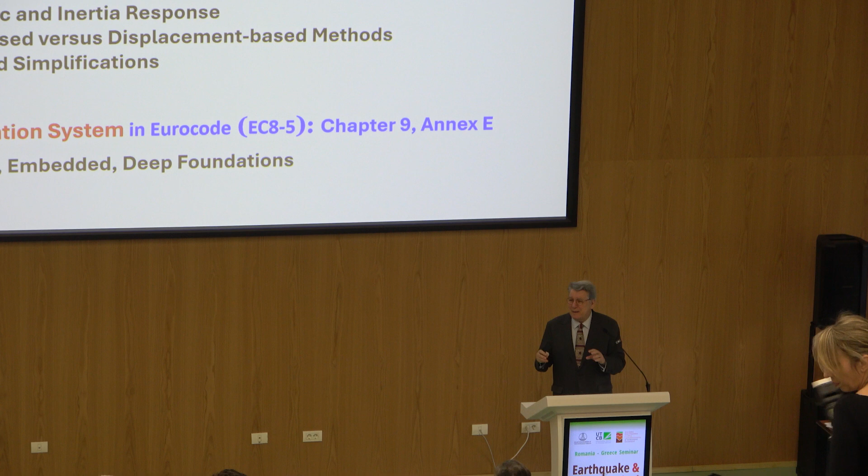And then, if time allows me, and this watch doesn't interrupt, I will talk about some aspects of the foundation system, which is very similar to the previous one. We have two separate chapters - I think it's a little bit too detailed for this, but anyway: shallow, embedded, and deep foundations.

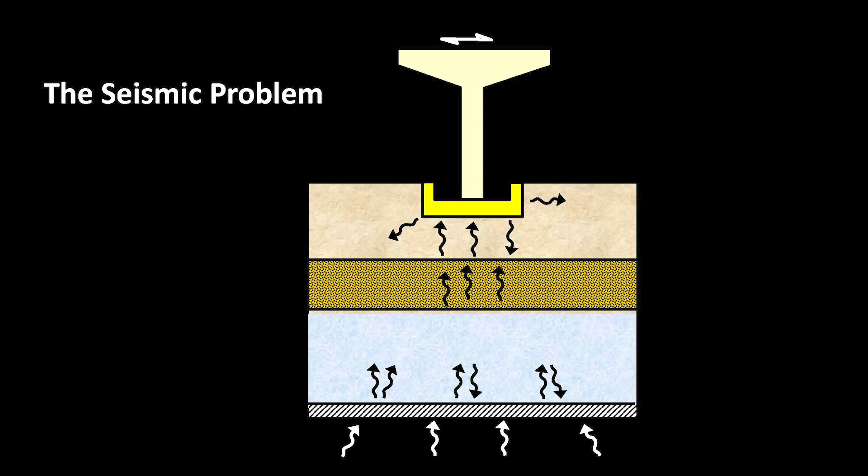So let me start with a basic seismic problem from the geotechnical point of view. We have the structure on the foundation, which is not just a simple spring as structural engineers usually see it, but a whole system. Here is an embedded foundation. The waves arriving from the base - not only vertical, all sorts of waves - propagate through the soil and affect foundation and structure as well.

We usually define the seismic hazard, the seismic motion, through a response spectrum. Kyriazis talked a lot about it, and this design spectrum may be defined for a rock outcrop motion or for a specific soil, as the new code is doing, in terms of a design spectrum about which I will talk. And then eventually we have the base motion of the system.

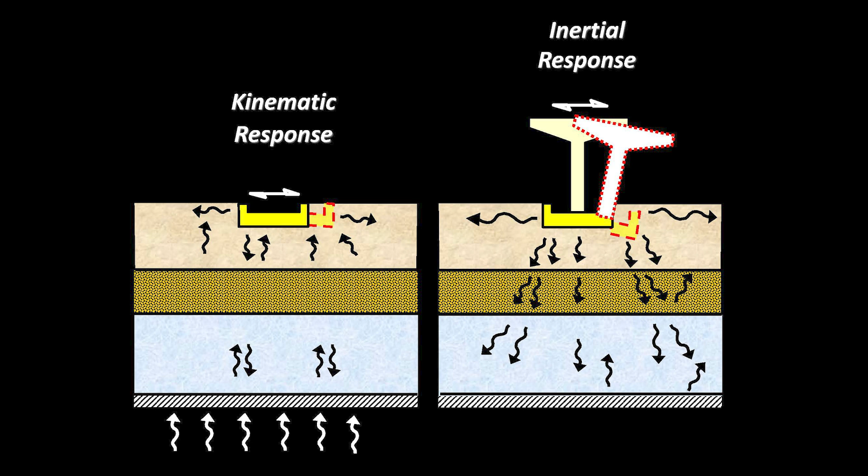Now we like to, conceptually at least, divide the problem into two aspects. One, called kinematic response, is the response of the soil and foundation without the structure. This is important - the waves will propagate through, reflect, and be modified by the presence of the structure, without any inertia. The inertia comes afterward, when the structure starts moving because of the motion of the foundation and sends its own waves back into the soil.

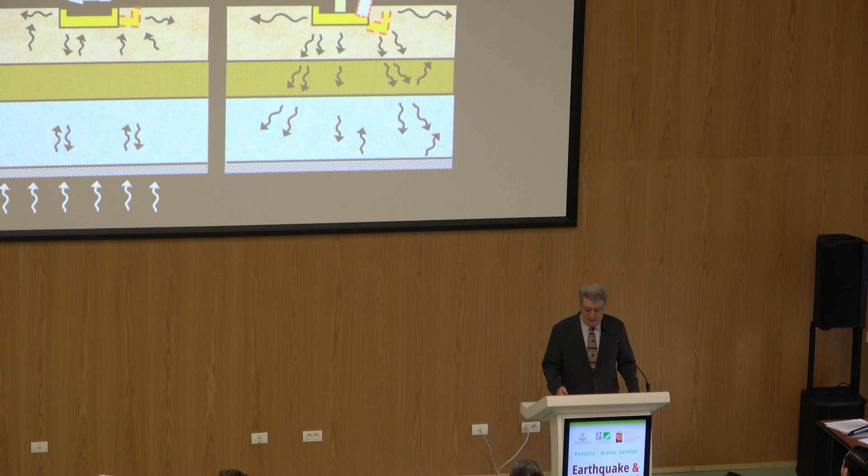From the sides, as you see here, propagating more or less horizontally and going down to depth. So these are the two problems, but I will start with the inertial response, because this is what classical civil engineering is using. We are familiar with this - the inertial forces and the foundation compliance.

Now, the inertial response means accelerations on the top of the structure, moving, giving moments and forces at the base, and producing the whole displacement from the inertial response.

Okay, now this inertial response has two effects. First of all, the shear force and the overturning moment - even the axial force as well, we have frames, but for simplification usually it's the shear force. Unfortunately for geotechnical engineers, it's denoted with the letter V, which we use for vertical, but this is the structural engineer's world, and here it stands for horizontal.

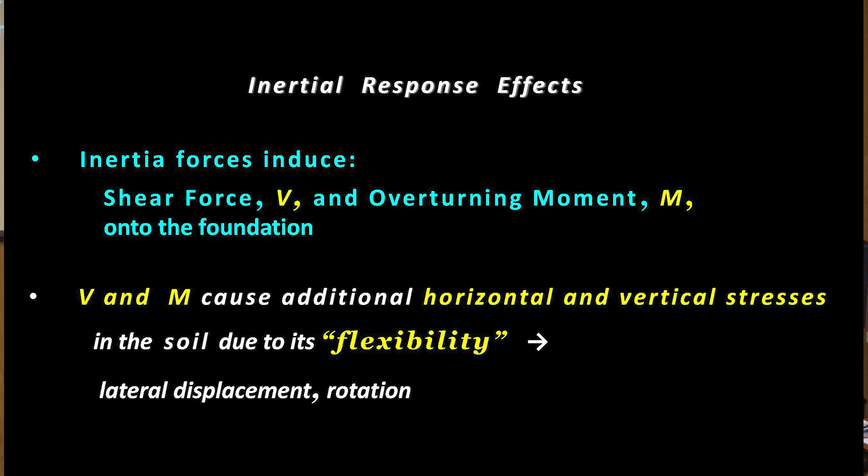I'm not using this in my research - I use another symbol, Q, a neutral one - but anyway, V, since in Eurocode I have to do this, is shear, not vertical, but horizontal. Anyway, these forces are induced into the ground, and then this V and M produce additional horizontal and vertical stresses in the soil due to its flexibility, and this creates lateral displacement and rotation.

Now, this is the typical thing: the classical non-soil-structure-interaction approach is to consider the structure, a simple structure here, on a fixed base, as if it was on rock, on rigid ground.

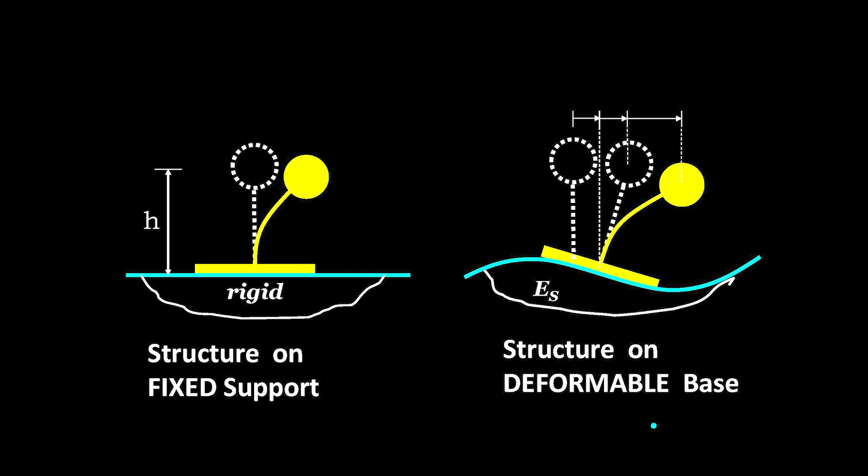Now, of course, reality is the opposite. The soil is flexible, deformable, compliant - this is a more appropriate word, and unfortunately I don't know Romanian well enough to say a nice word for this. And even if there is no sliding, there will be horizontal displacement in the ground, and there will be rocking displacement, and this is a totally new picture.

Now, how do we deal with this? It's familiar to use springs, at least, to replace the response of the foundation-soil system: vertical springs, horizontal springs, and rotational springs, with various names.

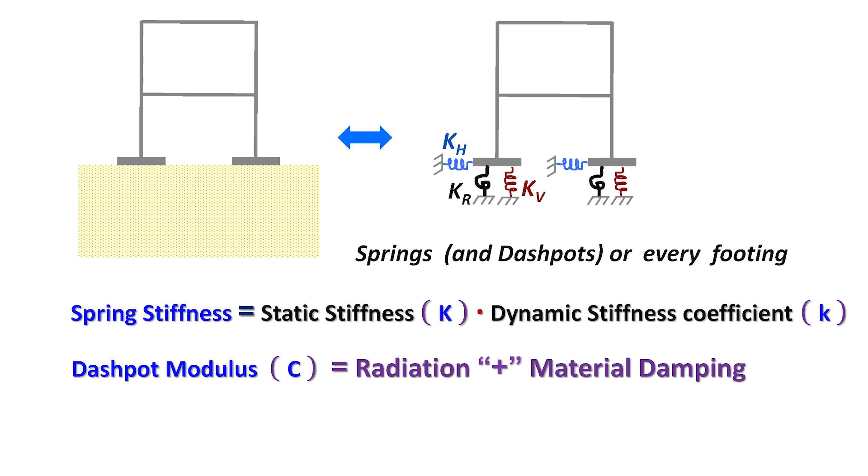This is not only springs, but should be accompanied by dashpots, because we have energy dissipated into the soil in addition to deformation, static type deformation, as I'm sure you know very well.

Now the spring stiffnesses of these things you see there, it's not only static stiffnesses, they usually vary with frequency. The Eurocode tries to handle this in a practical way for the engineer, other than say, do a complete dynamic analysis always.

And the dashpots, what are they? They include the usual inelastic material property dashpot, the hysteretic dashpot as we call it, material damping, but also radiation damping. You will see in the Eurocode this plus, in quotation marks, doesn't mean algebraic addition, but proper combination. Maybe addition sometimes.

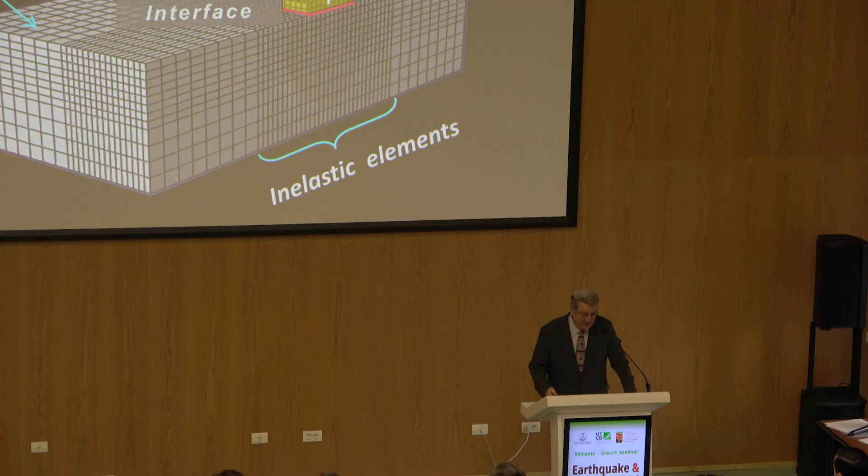This modeling can be done with finite elements, but I will not deal with this at the moment. I will deal with the springs and dashpots first. In reality, there are a lot of nearly exact solutions based on elasticity and finite element analysis for all these values of springs and dashpots.

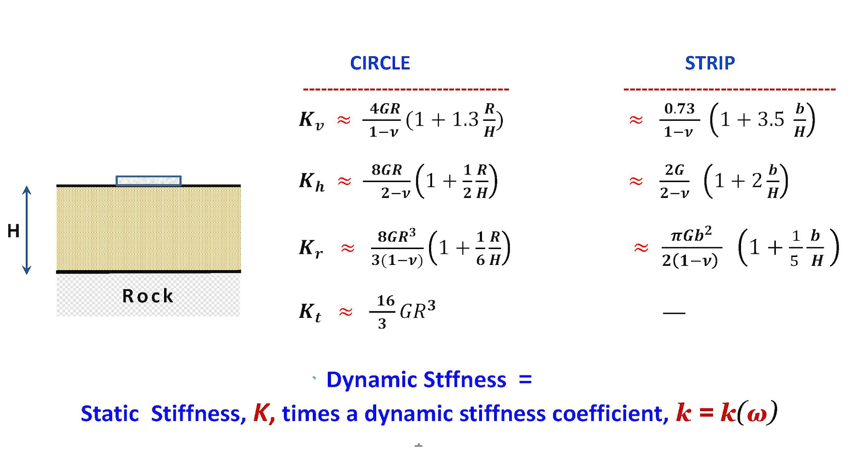For example, for a foundation on homogeneous soils on rock, as you see here for a circle and a strip, these values depend on the shear modulus G of soil, the dimensions of the foundation, for a circle the radius R, and also how thick the soil layer is. This H here is the thickness of the soil layer.

But we have to remember at the end of the day that these are only the static stiffnesses, and they have to be multiplied by a dynamic factor, which is a function of frequency. And this presents certain difficulties.

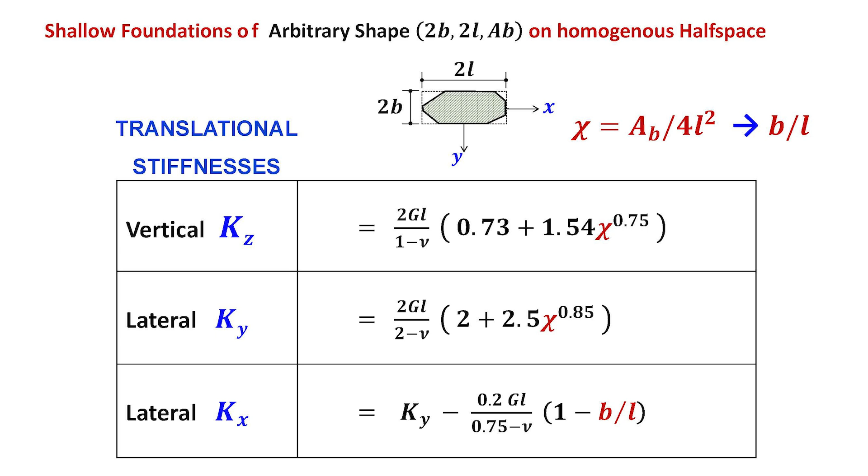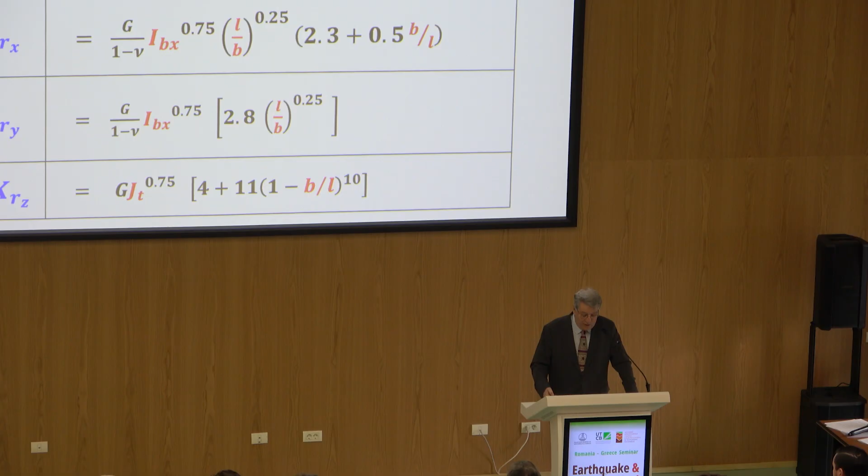There are solutions, again elasticity-based, for arbitrarily shaped foundations, any reasonable shape, where we circumscribe a rectangle. Through this you can have formulas for the translational stiffness, vertical, horizontal in the two directions X and Y, and also for the rotational stiffnesses with the symbol Rx, Ry, or Rz, depending on the characteristics of the foundation.

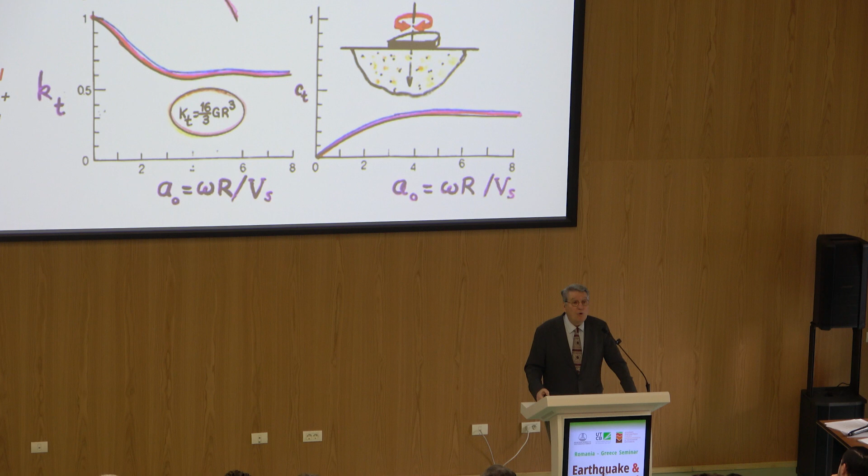And this is the range, if I may show here — no, it doesn't show very well. You can see the small values of damping. This is very significant for our analysis.

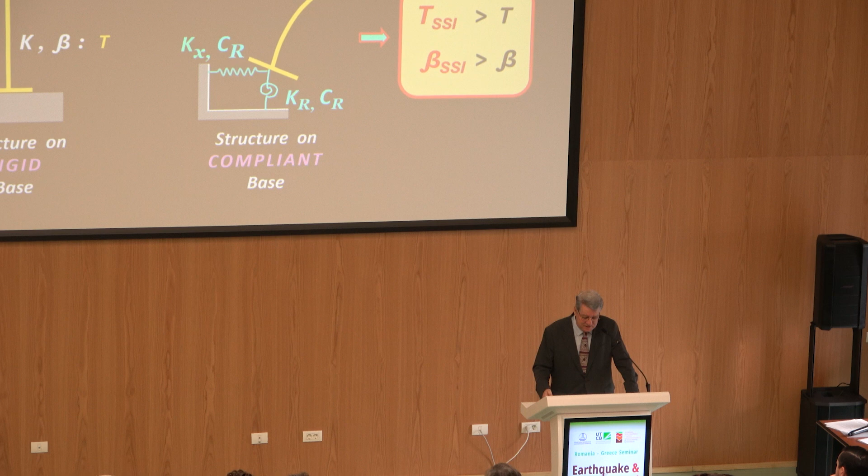The increase in fundamental period, which we all understand, and also the increase in effective damping. The increase in fundamental period for this simple 1-degree-of-freedom system is very easily obtained having the stiffnesses KH and KR, in horizontal and rocking motion.

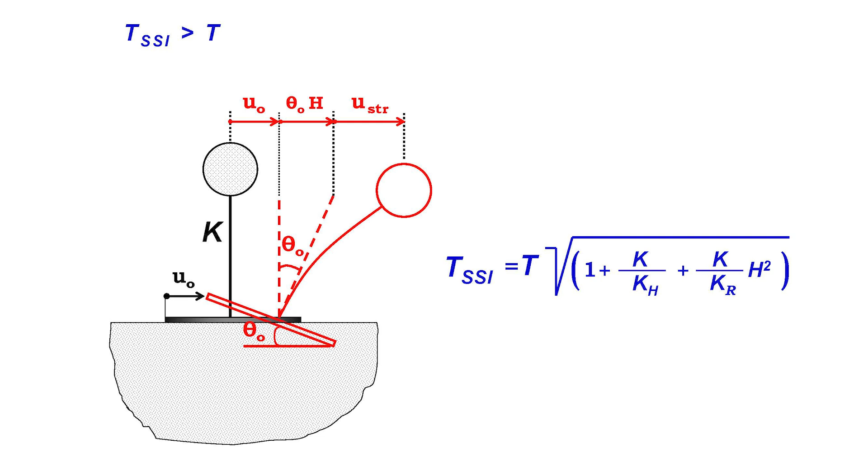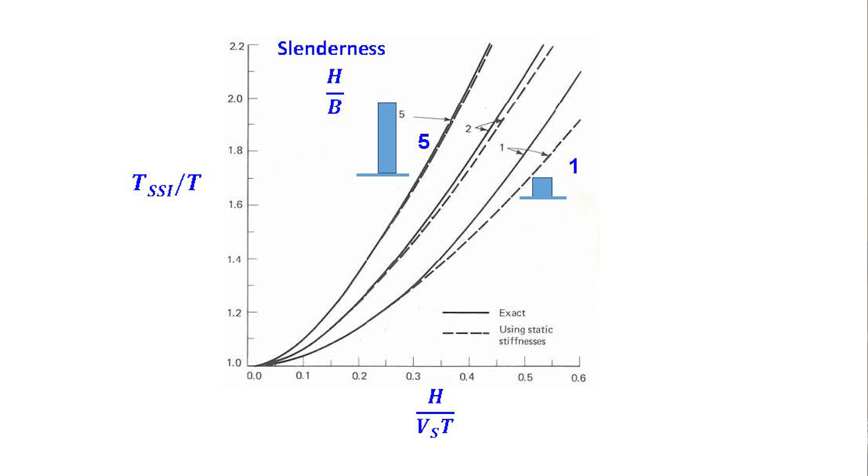It's very easy to derive these equations, I'm sure you've seen it in your earthquake engineering classes. The outcome is this: the fundamental period accounting for soil-structure interaction versus the fundamental period of the structure alone in a fixed-base structure. You can see this can have values up to 2 if the soil is very soft. The denominator of the horizontal axis indicates how stiff the soil is.

You can see here a very slender structure with H over B of 5 is, of course, more affected than a squat structure of 1. Now this is trivial, but the damping is very important.

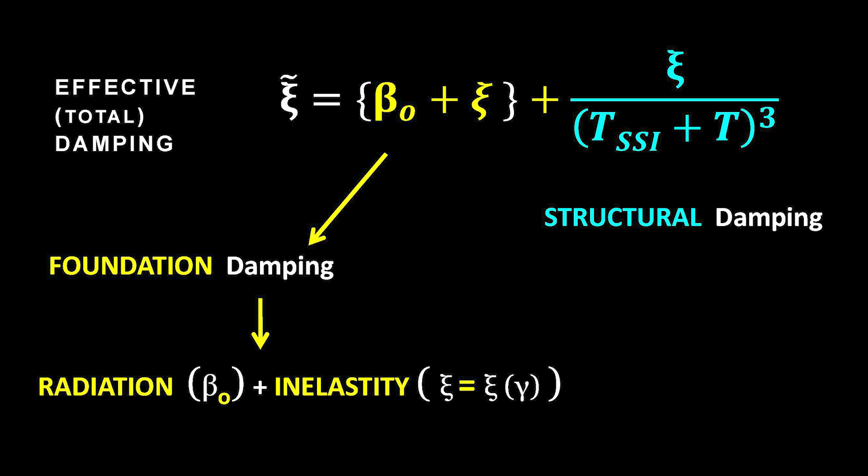Now the effective total damping of this system has a structural component, which I won't deal with at the end — this Xi you see here is the usual 5%, or whatever is appropriate for the structure. But this yellow part is the foundation damping.

And it has two components, the radiation damping and the hysteretic damping, due to inelasticity of the soil, the fact that the soil is not linear. And of course it's a function of gamma. I will talk just about the radiation damping, and here is the important thing.

This effective damping is significant only for structures which are not slender, squatty structures, H over B of 1. Why? Because horizontal shearing, not rotation, is dominant, and in horizontal shear the damping is very significant, as I mentioned previously. When it comes to rocking, for a very slender structure with H over B of 5, this radiation damping is very small, up to 5 or 6%, if the soil is very soft. Very significant to deal with this.

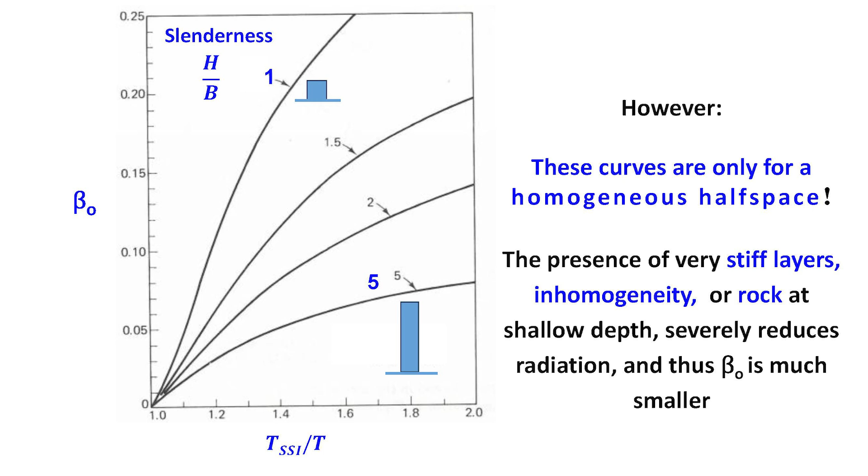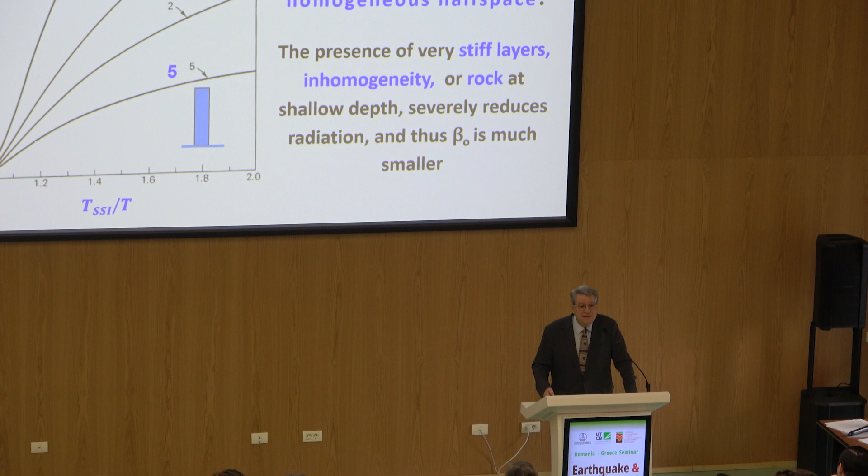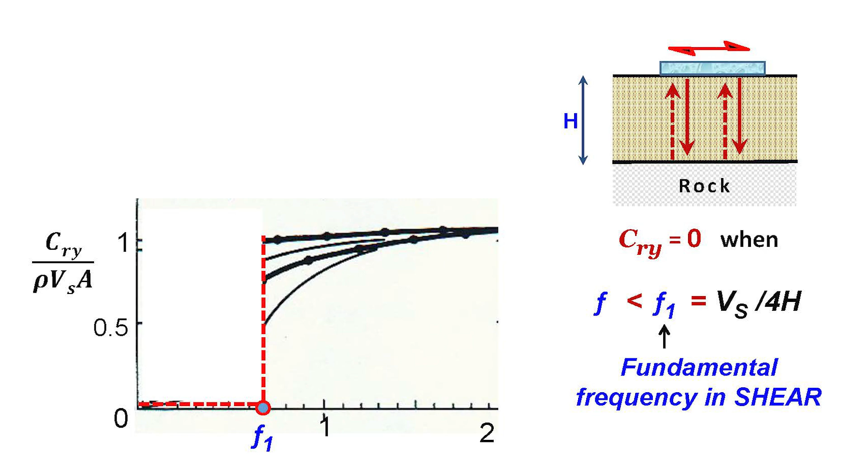More significantly, if you have rock, what does it do to damping? May not do much for stiffness, but for damping it's very significant, because waves emanating from the soil, especially in horizontal mode and even in rocking, will be reflected by the rock and returned back. So there is no radiation damping, no loss of energy from waves propagating to infinity. It turns out that below the fundamental frequency of the soil, there is practically no radiation damping. This is what I show here simply: below F1, in terms of frequency, there's practically no damping. This is an idealized curve, not exact - you'll see a better one later, keep it in mind.

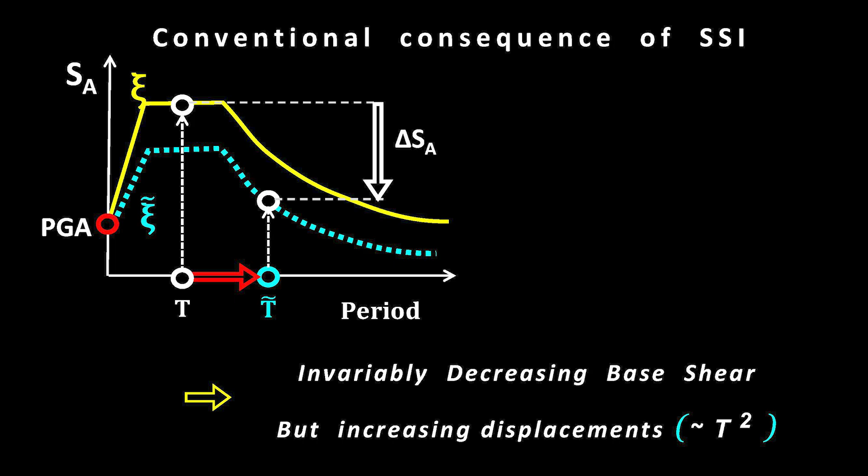Now, the conventional consequences of soil structure interaction, with the usual spectra derived by probabilistic analysis - which Kyriazis mentioned I don't like very much - for determining the design spectrum. I'm sure people in Bucharest will agree with me on this. But anyway, the classical thing is: as the period increases from T to T soil-structure-interaction, with this hat, you invariably move to lower values of spectral acceleration, especially if damping increases as well. Instead of the yellow curve, you get this turquoise, blue curve, and it seems the decrease in base shear will always be the case. But of course, displacements increase at the same time, since displacement is proportional to period squared for a given SA. But these code spectra imply SSI is always beneficial, and that's why most people have ignored it for so long.

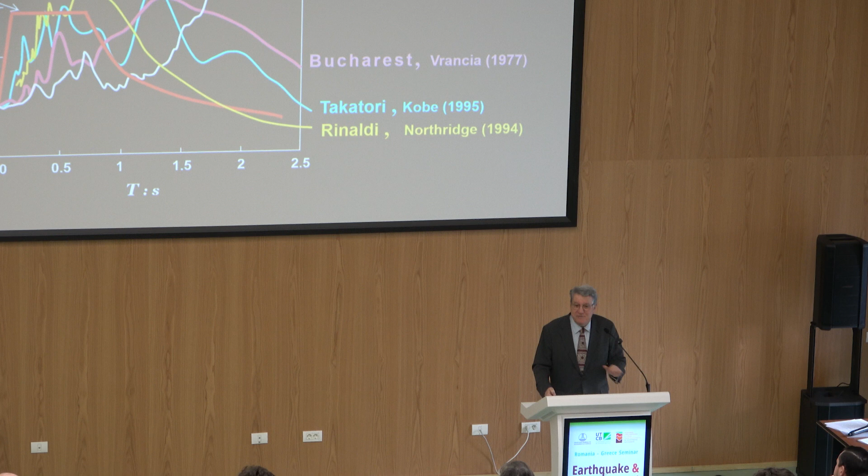But reality contradicts this, and in Bucharest especially this is definitely the case. Many other earthquakes show spectra that do not conform with code spectra. Of course, Mexico City is an extreme case where the fundamental period of the soils has a tremendous influence, but you know very well in Bucharest from the Vrancea earthquake, which is respected in the code - fortunately, some years ago I realized this, I'm so happy to see it - how can you say soil structure interaction, by increasing the period, makes things better? It can be much worse. Keep this in mind. I will not deal with it anymore.

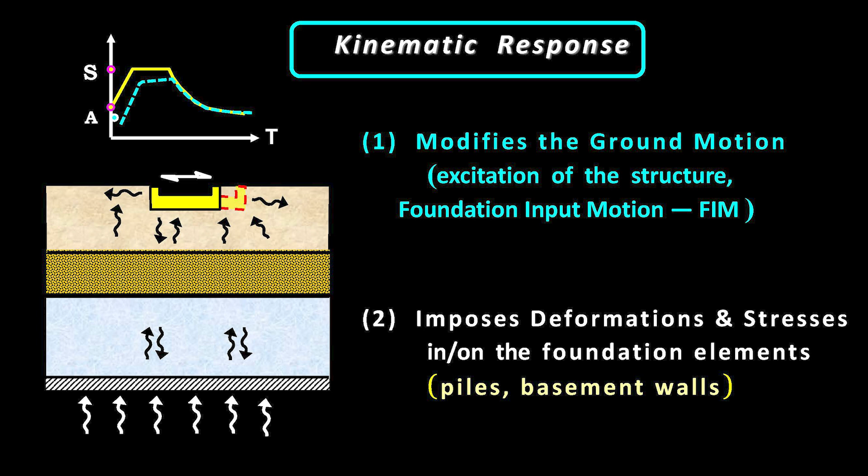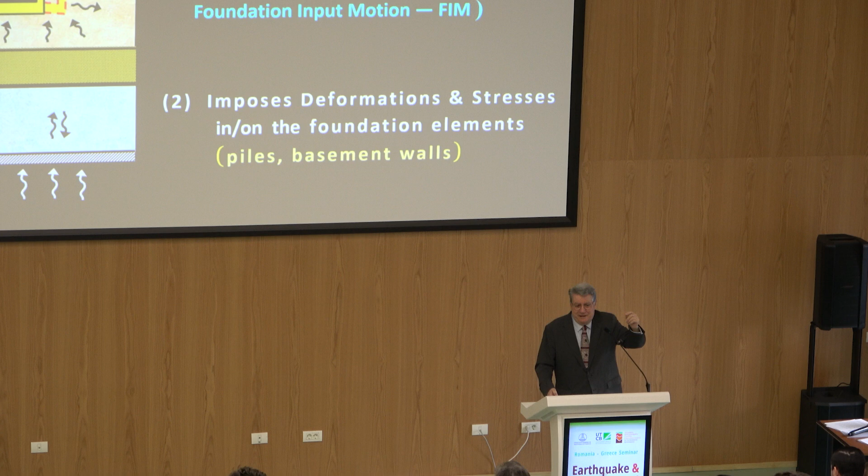Now I'm going directly to kinematic response, which is also very significant for two reasons. First, because the kinematic response modifies the ground motions - the foundation input motion, as we call it, can be very different because of the presence of a rigid foundation, an embedded foundation, or piles. I will show you some examples. Also, these embedded foundations unfortunately have to pay something for this - they will be subjected to additional distress, especially piles and basement walls, or retaining walls. Actually, basement walls and retaining walls are designed for kinematic effects, not the load from the superstructure, which they usually do not carry. Anyway, keep this in mind.

U0, which is the motion at the top, cosine of omega z over Vs, omega being the natural circular frequency of the wave, 2 pi over period, or 2 pi times f, times the depth divided by Vs. This is a simple-minded, one simple wave analysis.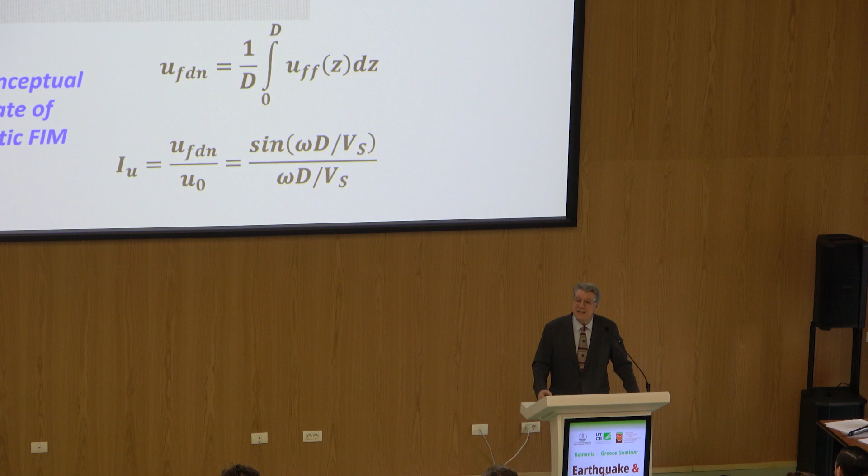Now, can this rigid structure follow this motion? No, it will go somewhere on the average. This is a simple-minded analysis taught in class. Taking the integral of this motion divided by the depth, averaged over the depth, gives the ratio of foundation motion over U0, the free field motion. This is plotted like this.

Now, of course, a more realistic analysis doesn't go all the way down to zero, it stops somewhere here, but this is what the more informed spectra look like.

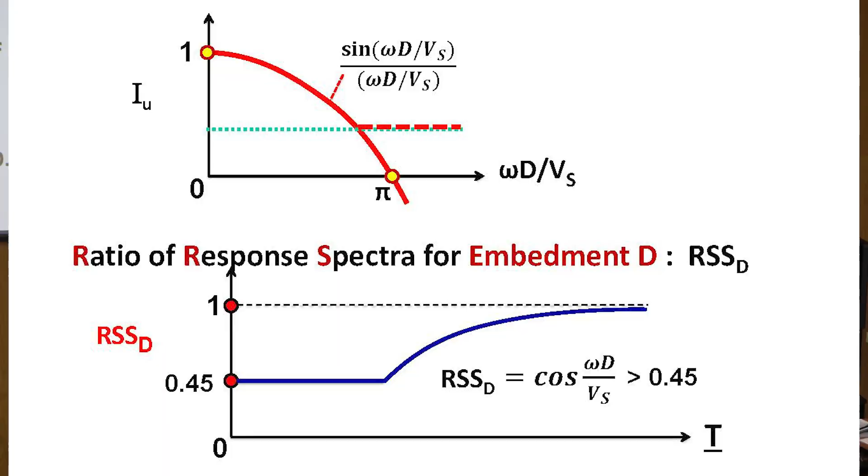This is in terms of period. Unfortunately, in dynamics we used to work in frequencies, but now engineers like to work with periods. So it's inversely related. The red curve here corresponds more or less to the blue curve, and this cutoff that I showed, 0.45, looks like this.

But this is significant. For embedded structures, this is a very significant reduction in effective input motion. It makes a great difference if you take it into account.

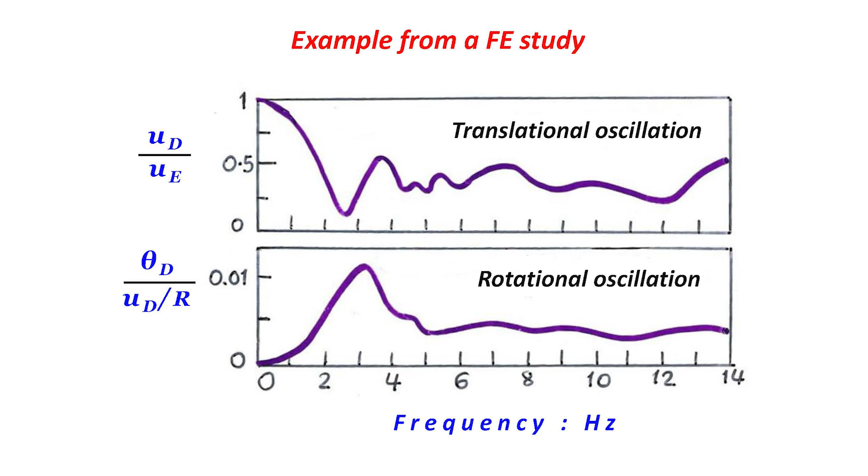Now I have another example from numerical analysis. The free field motion compared to the motion of the base — they are very different. Here is the ratio of displacement from an exact elastic analysis, UD over UE, in terms of frequency, very much like the curve found at the beginning with the simplified motion, but after a certain frequency it doesn't go to zero, it oscillates, and at the same time there is an imposed rotation.

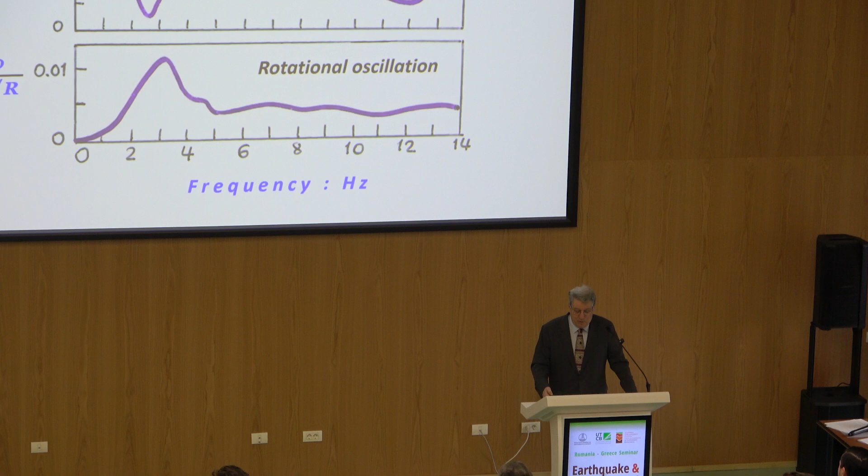This is regardless of the superstructure. This is just the free field motion only. Okay, now, how about piles?

Piles, of course, will modify the free field motion. They cannot follow the detailed motion of the ground unless the period is very large and the wavelength is very large, more or less.

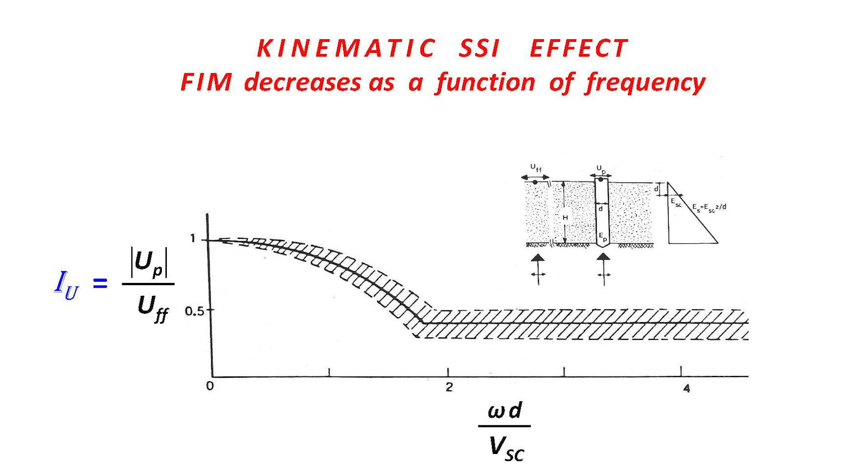I have here an example from some early studies I did for an inhomogeneous soil with a pile, and of course the motion at the top of the pile follows more or less the initial curve I showed before with this simple idea of averaging the motion, which convinces the students at least that this is what is happening. All right, so this is the story.

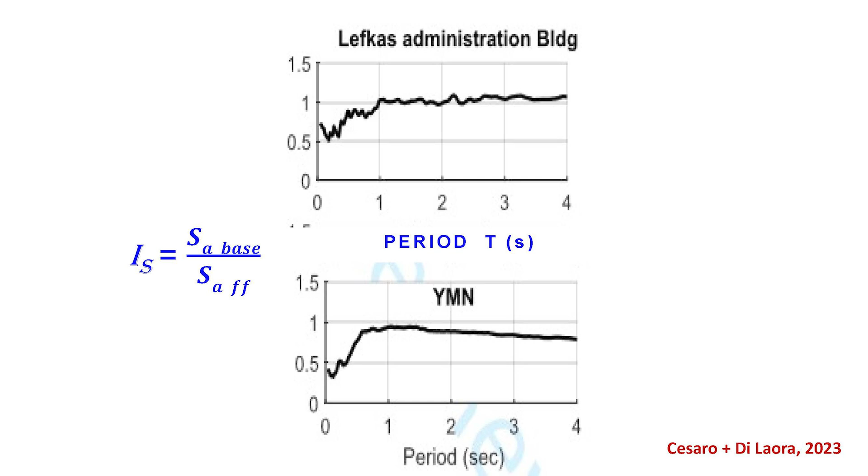Now, in terms of period, some recent results from Cesaro and Di Laora, two Italian researchers who used actual time histories in piles, show the same thing. The motion at small periods, less than 1 second, is almost 0.5. You may not think this is significant, but it can be a very significant reduction for pile foundations. And of course, at high periods, there's not much difference.

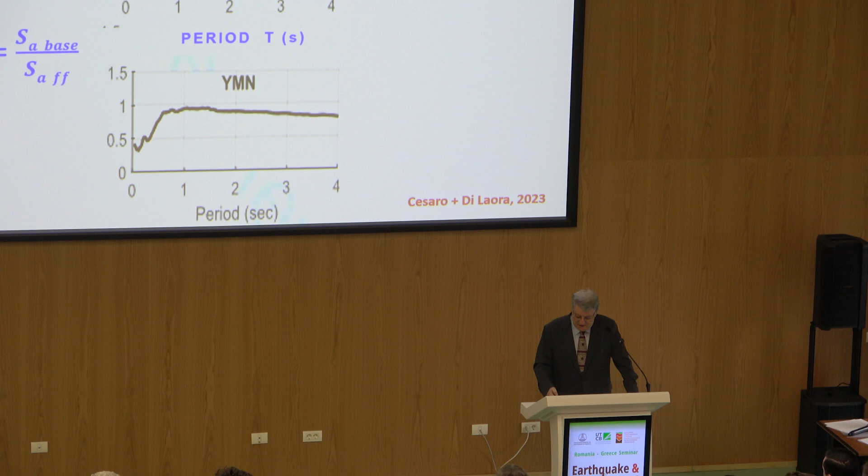Now, however, there is something missing in Eurocode. It is mentioned only briefly, the so-called base slab averaging. It is for large dimensions of foundations, not for isolated footings far away from each other.

We tend to consider waves going vertically upward, but there are also inclined waves, which can be incoherent. As the wave fronts come in, the left part of the foundation will be hit before the right part. There will be a phase difference in motion — the foundation will be pushed to the right on one side and to the left on the other side.

Now, a mat foundation or a raft foundation in the horizontal direction is very rigid, very stiff. Nobody computes horizontal displacements of the raft — it's not bending, it's horizontal displacement — and it cancels out these motions. It filters out the wave propagation.

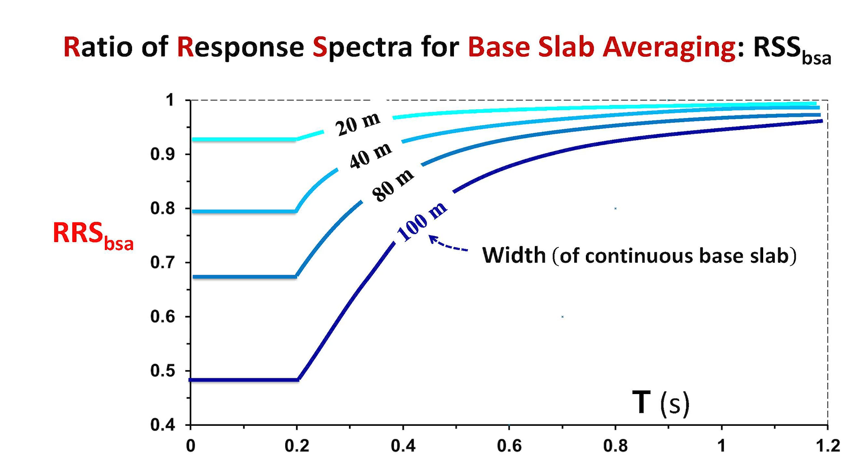As a result, there is this base slab averaging of spectral accelerations, which you can see for very long foundations, 100 meters or even more. It can be an additional reduction. This has nothing to do with embedment — this is for surface foundations. Just because of their size, you're allowed to use a reduction of the input motion.

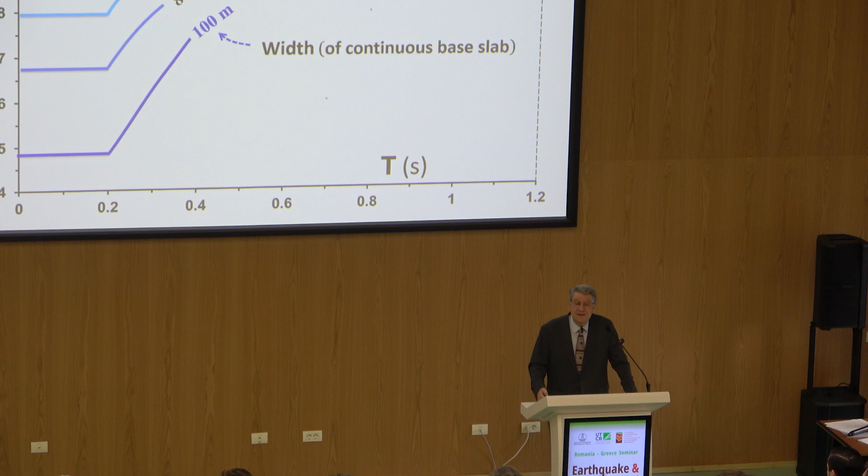All these things — embedment, piles, and base slab averaging — can have a diminishing effect. What is not very well understood yet, with not much study done, is the penalty to pay for this: for piles and other things, they get some lateral loading. So regardless of the superstructure, the piles will be subjected to lateral loading.

And they have to be accounted for this. This lateral loading increases the moments, of course, at the ground, at the surface, but also at the depth, at the interfaces of different soil properties. And of course, this has to be added, in quotation marks, to the forces that come from the inertial response from the structure.

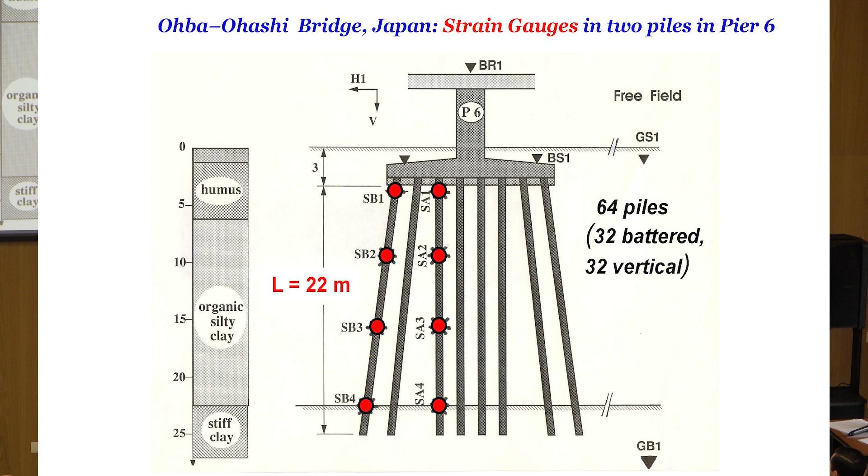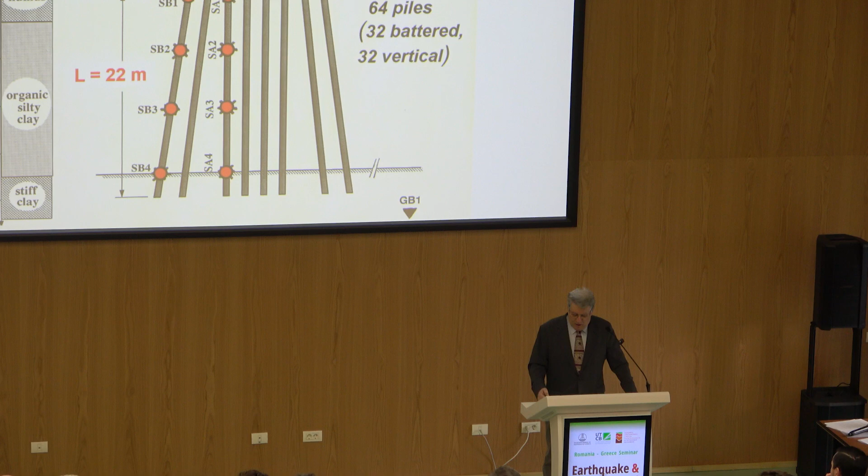And I have here one example, because this interface motion has been even in the previous code. And to impose something in the code which is unusual, you have to have case studies to verify it. We had a very significant case study from Japan of a bridge with 64 piles, a regular bridge, nothing special, passing through very, very soft soil. Now, very soft soil, you can see here the properties, SPT is close to zero, and very, very small shear wave velocities. Now, what do you expect?

We had measurements of axial and bending moments. Axial moments, no difference with depth. Why? Because the load coming from the superstructure, the inertial loading, did not diminish at all, because the soft soil did not impose any shear tractions in the soil. It went all the way down to the depth.

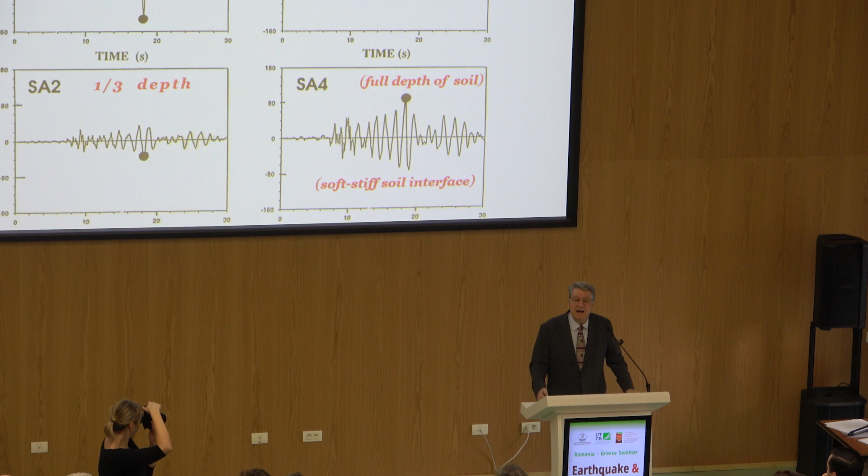But the bending strains, a totally different story. The bending strains from the superstructure diminished very rapidly with depth, but then all of a sudden, at great depth, increased very much so. That's what happened, as the kinematic soil structure interaction shows it.

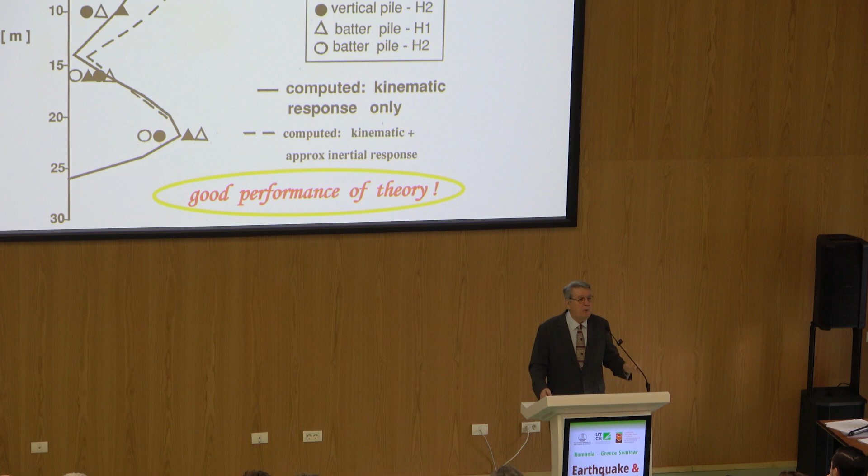You can see here the dots are the measurements. The measurements, of course, don't distinguish where they come from, kinematic and inertial, but the kinematic analysis, the simple kinematic analysis with springs and dashpots, predicts very well what is happening at the base, at the interface between the very, very soft soil and the stiffer soil at the base. And this is the convincing point why the Eurocode suggests that the interface between two different stiffnesses has to be accounted for. Now, not well understood, as I said.

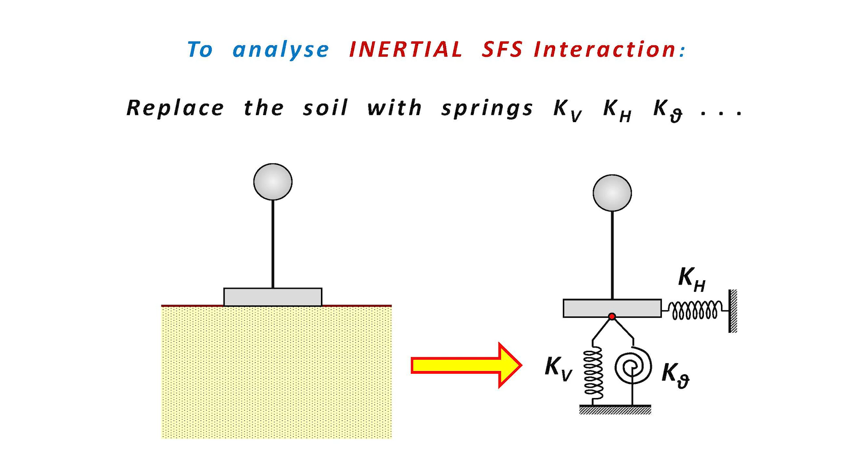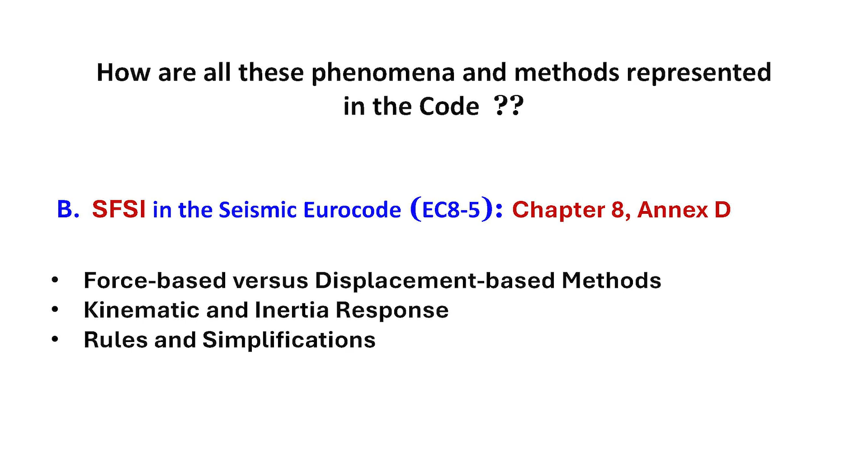Anyway, so now, the method of analysis, I will go through it very crudely, and I come here to the Eurocode. Now, how does the Eurocode represent all these phenomena? Well, some things are very simple. First of all, the Eurocode distinguishes two different approaches: force-based approach and displacement-based approach.

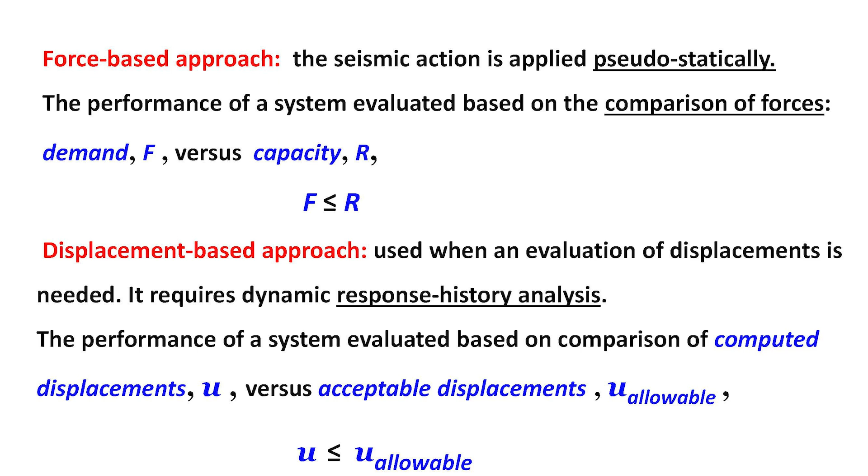Very significant. Force-based approach is what the civil engineer is used to. It's basically a pseudostatic approach. It's really what we are doing every day, engineers. And it's comparison of forces. The demanding forces should be less than the resistance, or the resistance should be higher. Very simple. This is what everyday practice is.

The displacement-based approach is really a dynamic time history analysis. And the distinction is very clear. The code is very strict in the first part, and very liberal, if I may say the word, on the second part, where only displacements at the end of the day are compared.

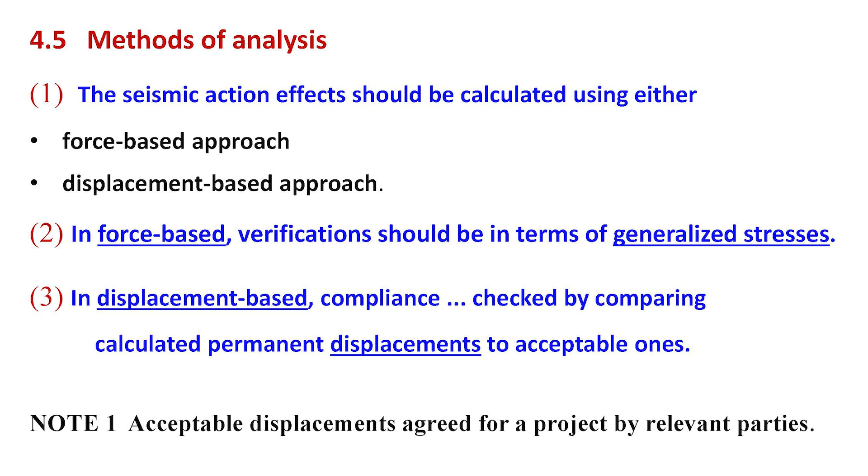Now, I will say one important thing: the effective ground acceleration, which we're using in our analysis. First of all, the acceleration is called with the Latin A of h, and the Greek alpha is used for the dimensionless, divided by g basically. But now the important thing is the effective ground acceleration, the way that Kyriazis has mentioned how we define it. God knows how you can find it with all these details, but anyway, you'll find it.

But for the design, we don't take it. We divide it by EC8, which is for a force-based, the conservative pseudostatic approach. We divide this by a coefficient which is a function of how much displacements we are allowing, how much displacement the structure can undertake, and how much we allow. For example, for retaining walls, you may very well know, we divide by 2. We don't take the peak acceleration, that's where the 2 is.

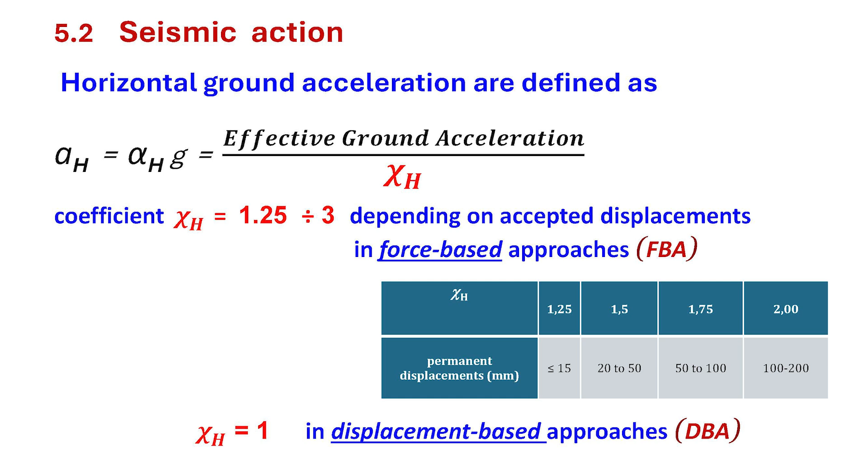And here is a chart, depending on the displacements for footings, it can go even higher than this, how you decide on this. But for the detailed displacement-based approach, there is no guide. You do the exact foundation, you do the dynamic analysis, and at the end of the day, you compare displacements.

Now, anyway, a few more other things. Now, the inertial and the kinematic effects are mentioned very clearly, as I mentioned before. And, I'm sorry.

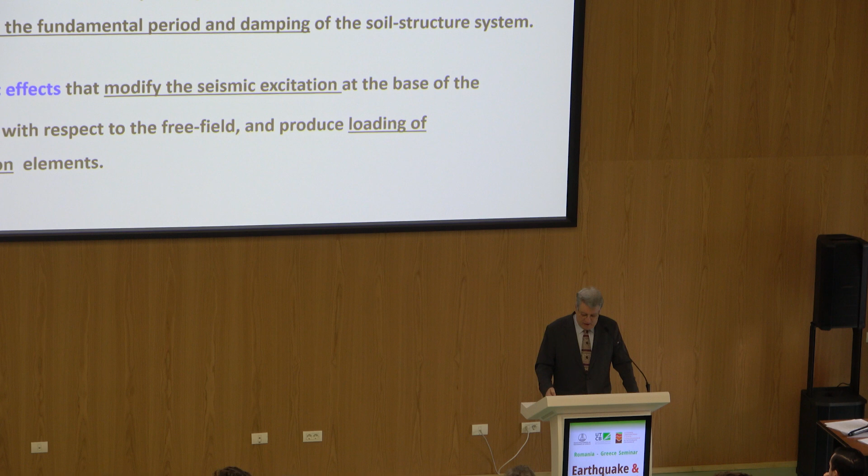Now, where else do we use it? Can we avoid it? This is an important thing engineers ask. The code is really trying to help the geotechnical engineer doing the analysis. Do we always have to take into account soil-structure interaction, or can we avoid it? No, for Bucharest, forget it, you have to take it into account, because when it is mandatory, increasing the fundamental period increases the spectral accelerations. Only for very tall buildings, 20-story or more in Bucharest, you don't have to take it into account, but for such important structures you will take it into account because the displacements are important.

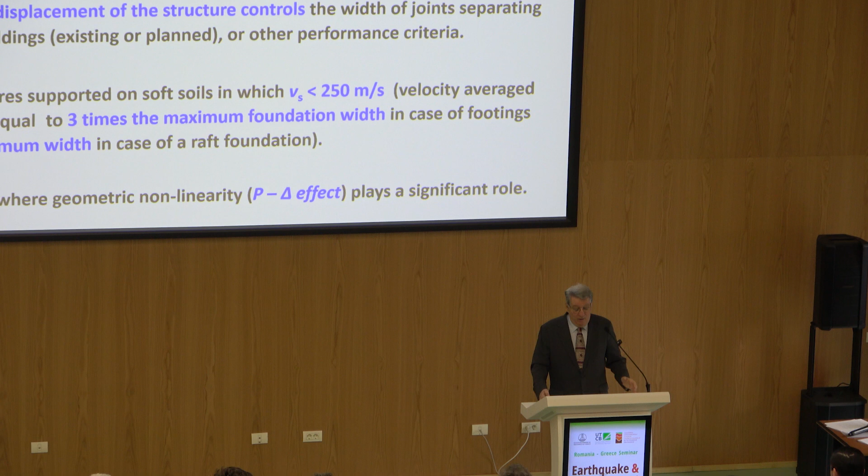Anyway, when displacements are important for joints separating, when the structure is founded on very soft soils, when P-delta effects for tall structures are very important, so in these cases you should. So the idea of this part of the codes is to try to help the engineer avoid some of these kinematic effects.

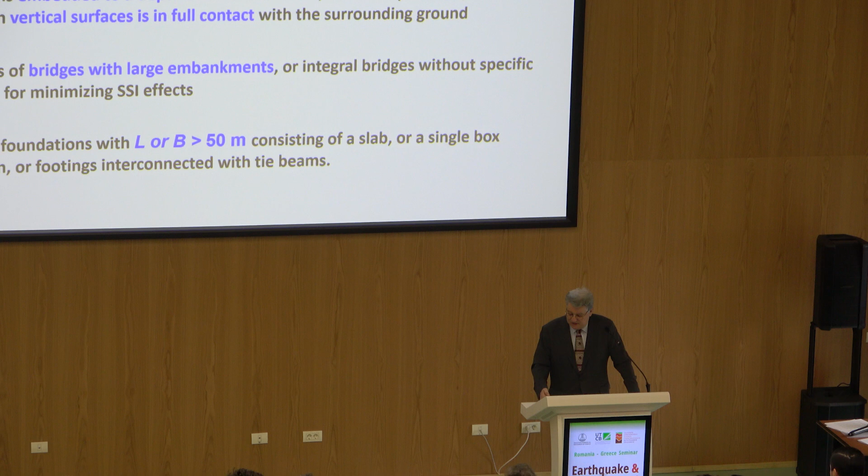Do we always have to take it? No, if you don't want to reduce your motion. But if you have piles, in case of deep foundations, you have to account at least for the additional moments at interfaces and at the top that the kinematic effects are producing. The retaining walls, unavoidable, only the kinematic effect that is imposing. So if you have an embedded structure, if you have abutments of bridges, or very large foundations, as I mentioned before, the idea of this part of the code, which continuously runs like this, is to help.

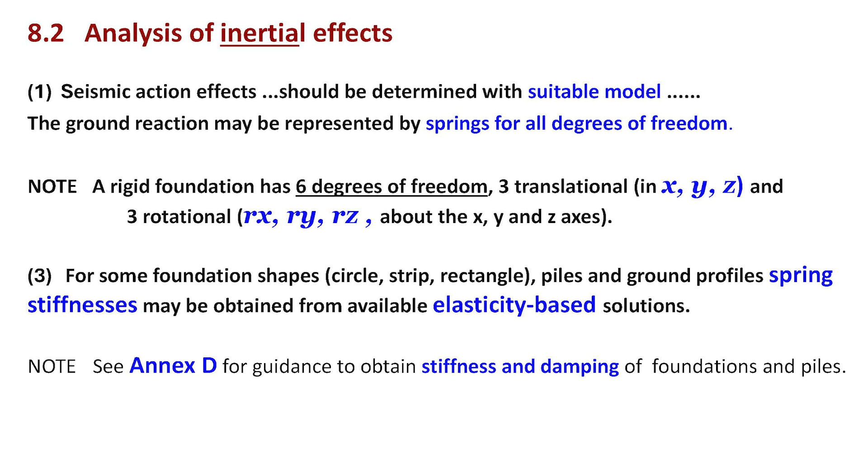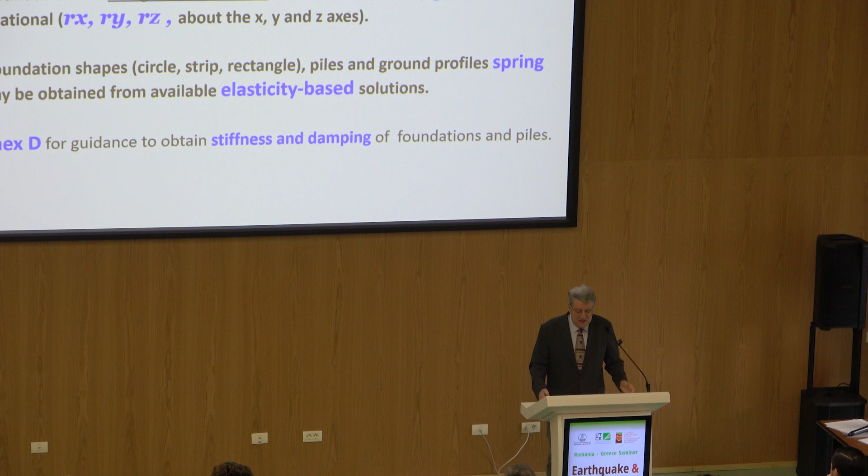I will not talk about the flexible piles, this is very typical. Now, the inertial effect, the code just suggests using the elasticity-based solutions. It says we have 6 degrees of freedom in general, and the annex presents simple elasticity-based solutions for horizontal, rocking, and coupled horizontal-rocking mode for the piles.

Do you use this easily? Well, you have to use a proper Young's modulus, not the elastic small-strain Young's modulus which you get from a VS analysis. You have to take into account the unavoidable nonlinearity and take a strain-dependent modulus. The same thing for the footings.

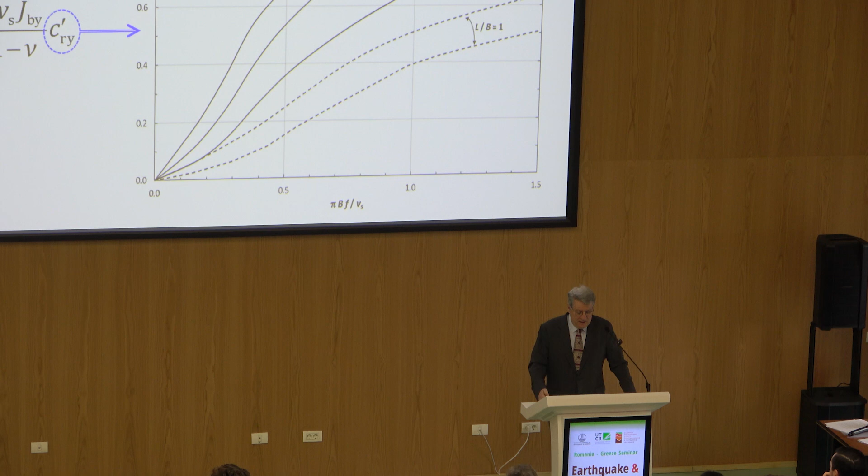Now, with the damping, the translational modes have very significant damping: rho, VS, A. This radiation damping will be undercut by the presence of a stiff layer or inhomogeneity. This is what the code is giving, along with other curves like this as suggested in codes. Now, the important thing, what does the code do? Just give this analysis which you can find in the textbook?

No. Where can we use frequency-dependent stiffness? Guys, we cannot do dynamic time history analysis. Frequency-dependent stiffness, yes, you can use it, but at what period? At the period of the fundamental mode, the fundamental mode of the soil, the natural period. If you cannot find this fundamental period, use the static stiffnesses.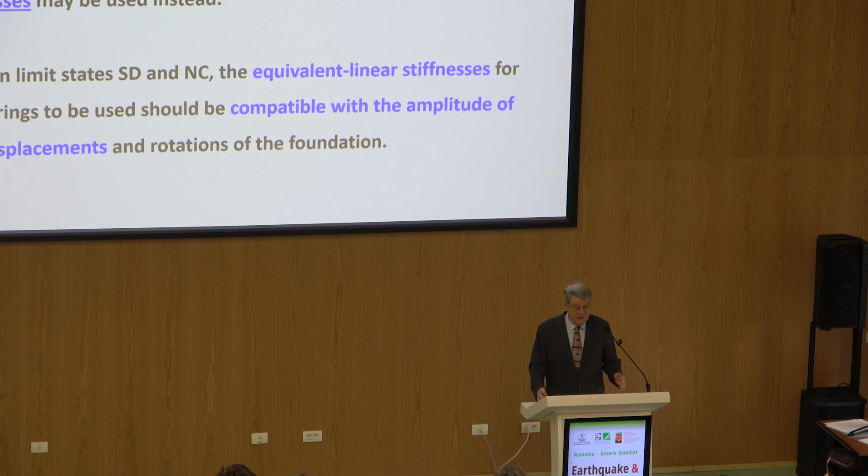So simple ideas like this are continuously written in the code if you try to read it. Of course, equivalent linear stiffnesses, as I mentioned, should be compatible with the strains; this is what the second thing is mentioning. Now, in the first force-based approach, the simple approach, forget about damping. We're doing pseudostatic, and pseudostatic and damping, radiation damping, don't mix.

Other than this, radiation damping should be used only limited to 20% damping, unless you have done a very proper detailed analysis. Now, in the displacement-based approach, you can use all kinds of nonlinear inelastic springs or finite element nonlinear analysis, of course, and it is, as I said, quite liberal. Uplifting and slippage of the ground is allowed; there's no restriction on how much the soil can uplift, so they may be included in the model.

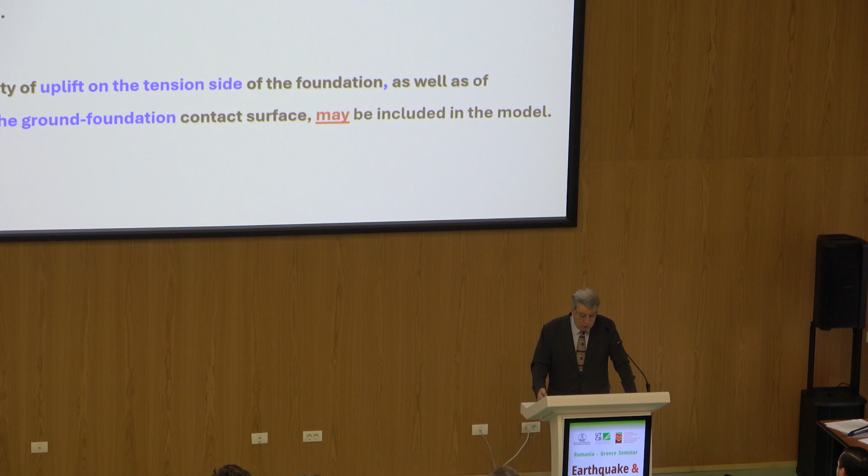Now I mentioned this, the high frequency and the fact that frequency below the fundamental frequency of the soil should not be accounted for. And now this is an interesting thing.

Modeling the kinematic effects, you can model it as part of the whole structure-foundation-soil system, or as a separate analysis of kinematic and inertial effects. A Winkler model can be used, finite element or finite difference models can be used. These are rather trivial things.

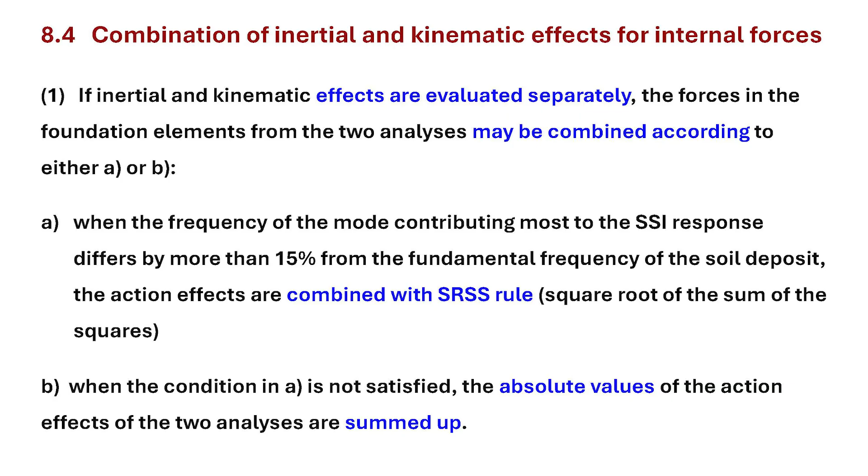This is an important thing: how do we combine this, plus, in quotation marks? This is what this shows, how do we combine inertial and kinematic effects? Now, usually it says we combine it, see the A aspect there, with the square root of the sum of the squares. We do not add them algebraically unless a special condition is satisfied. This is important because, especially at the top of the piles, you may have very, very large inertial and kinematic bending moments. You do not add them algebraically, but you combine them with the square root of the sum of the squares.

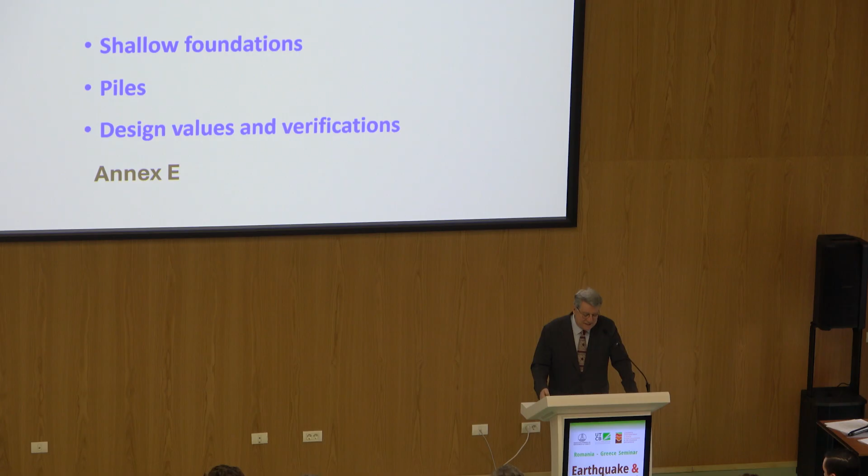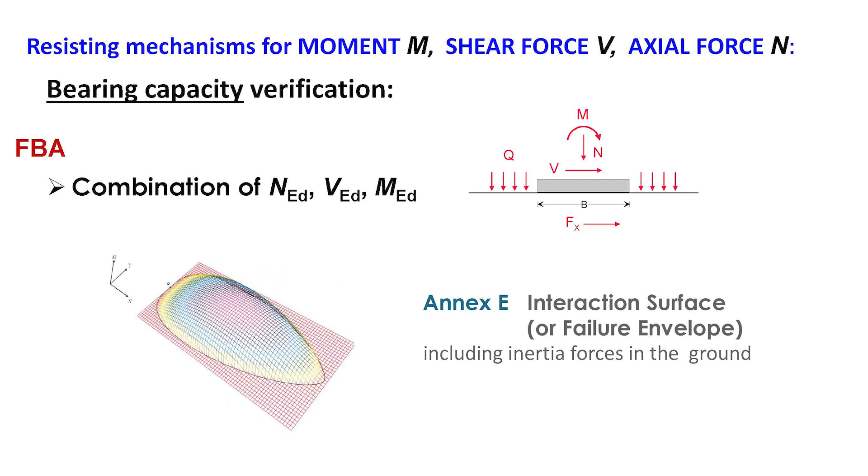Now, when I go to the foundation system, they're more or less the same things, I will not go into details of this. Let me move a little bit forward and cover only the more important things. Now, it says sliding, we all know this. When it comes to moment, it creates an axial force. What is the problem? The bearing capacity.

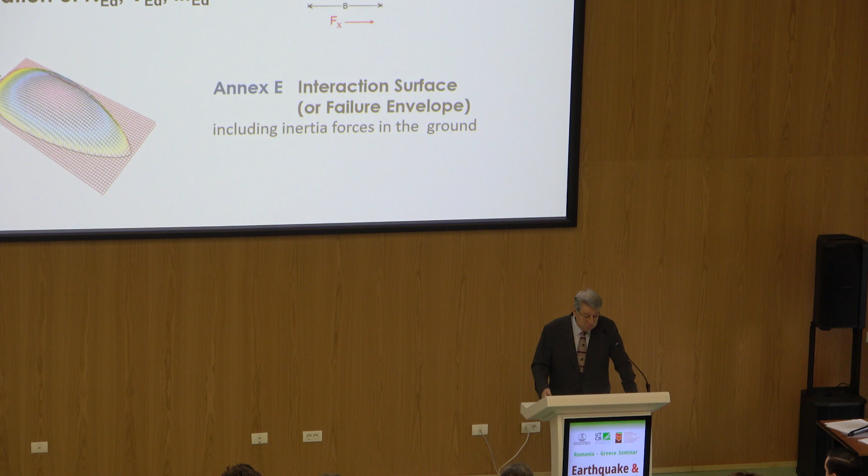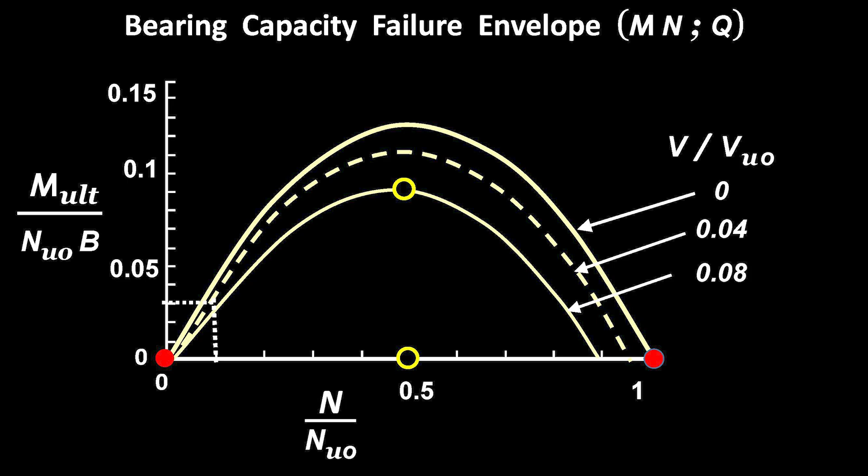Now, for verification, the suggested approach in Eurocode, in Annex E, is an envelope in three dimensions, a failure envelope. But I would say using the classical theories of determining this through the Terzaghi coefficient is good enough. In case you haven't come up with what this three-dimensional surface is, I have a two-dimensional version: ultimate capacity versus N, curves like this, which depending on N, M, and the shear, let you find the ultimate capacity of the foundation.

I'll not deal with this. Rotational failure mechanisms - now that's important. In displacement-based design, uplifting and rocking is allowed as much as you wish. In fact, our recent studies of the last 20 years show that it's better to have a lot of uplifting. It benefits the superstructure a lot.

But in force-based design, things are very strict. Only one-third of the area of the foundation should be uplifted, meaning an eccentricity, a dynamic eccentricity, of about one-sixth of the base. And the pile foundation is the same thing.

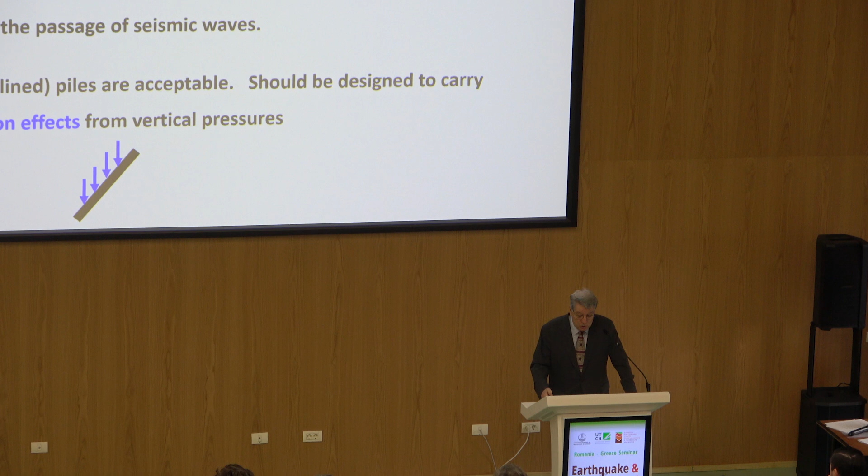Battered piles - now, why do we say inclined piles? In previous codes, they were very strict, forbidding battered piles for whatever reason, because they thought the axial forces are very significant and would create buckling. Now we have abolished this idea, but still battered piles should account for the additional loading from gravity, in addition to what comes from seismic action.

And now another final important thing. When we have pile groups, the cap-base–soil interface, we have a pile group - do we account for the shear that the mat foundation is exerting? This can be extremely helpful, but we don't believe it is acting. Now the code is very strict. It says no contribution for this if the distance between piles S is less than 6 diameters.

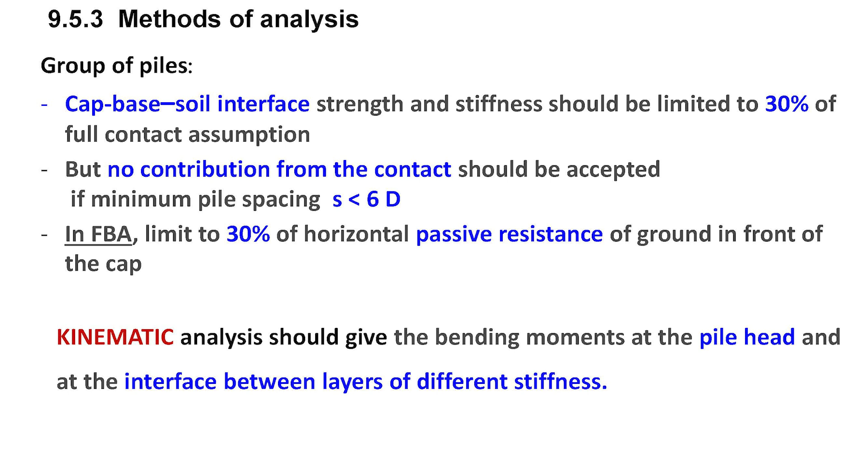I think it's a little bit too much, but people, even at 3 diameter spacing, which is very close, usually account for the base shear. But you know, the piles being there will not allow the soil to transmit much of the shearing action. So anyway, in force-based design, the passive resistance should be limited to 30% of the maximum. We're not allowed in an embedded foundation to transmit forces with passive resistance.

Only 30% of it should be accounted for, because it needs a large displacement to arrive at the passive resistance. With a displacement-based approach, find out what the displacement is and whether it satisfies it or not. But anyway, finally, kinematic analysis should give the bending moments not only at the pile head, but at the interface between layers of different properties. There are certain pieces of advice for what to do if you don't do the analysis when you have interfaces with vastly different properties, like how to reinforce the concrete above and below the line of interface. So there are some practical pieces of advice, but this is the basic idea.

And finally, do we allow plastic hinging of the concrete elements, the strictly foundation elements as we call them? No, we don't allow much structural damage in the footings, but for piles we have relaxed this restriction. We have actually made this a little bit more unconservative - we do allow some yielding of the piles.

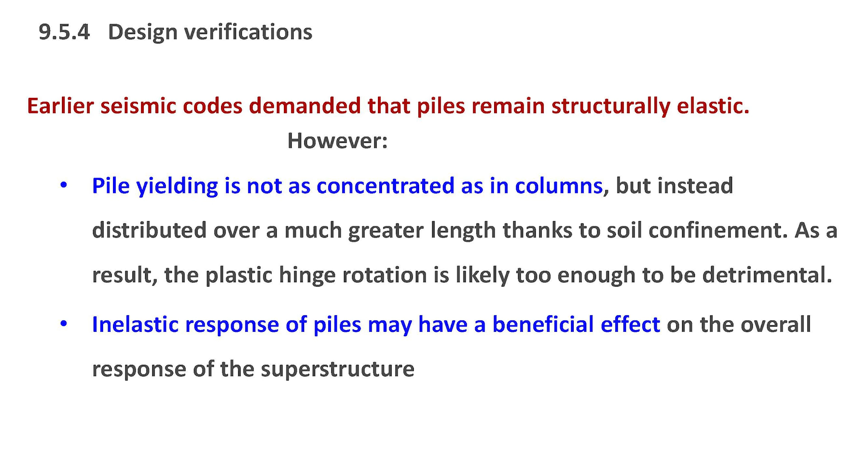Why? Because we found out from analysis, originally from the late Professor Priestley, that because of the presence of the confining soil, the yielding of the piles - the plastic hinging - is not as concentrated in a single point as in columns. It's much more distributed, and because of this, the rotation is not very significant. So we do allow inelastic response of piles, provided of course the outcome of displacement allows that. Inelastic response of piles may also have a beneficial effect, like the inelastic response of the foundation and the uplifting of the foundation. So that's the idea.

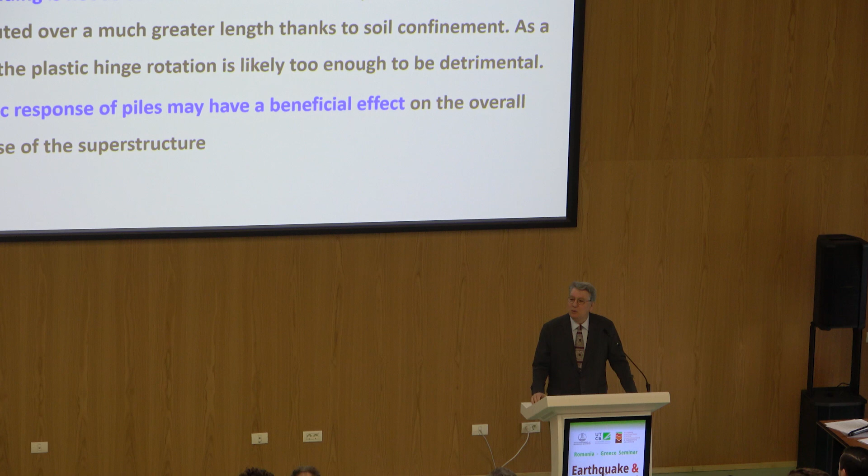I don't know, I went a little bit fast over the codes, but the basic idea of the code is trying to be as scientifically correct as possible, while at the same time continuously giving advice for simplifying methods and simplifications for practical design, when it's not necessary to do a complete three-dimensional nonlinear dynamic analysis of everything - which of course, 10 or 20 years from now, may be the easier thing to do. The code may say, okay, just two lines of code should be enough.